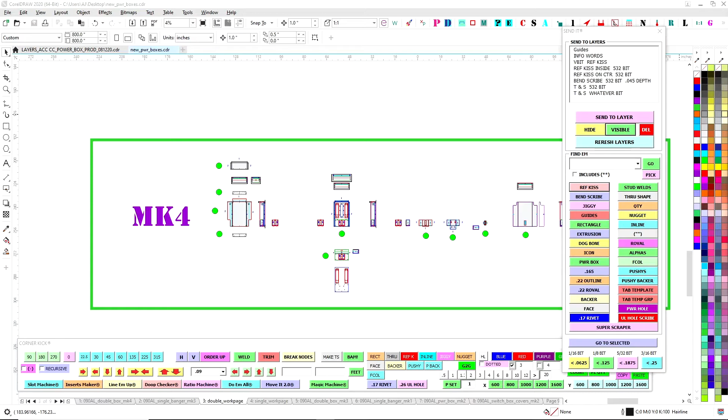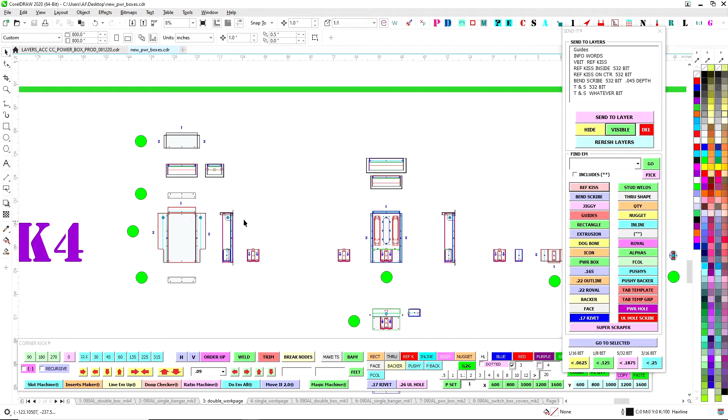All right, so a quick review of our standard power supply boxes here. This kind of piggybacks off of the last video. So we will be using the double banger for the north side Agua Caliente letters because the access is only a 12 inch by 12 inch access panel. So we had to make this a lot smaller.

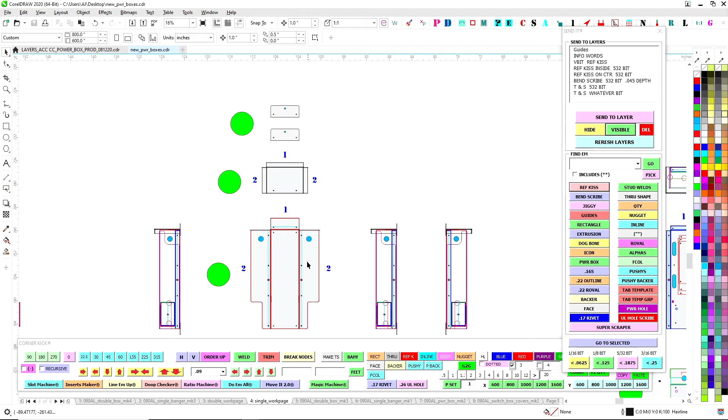And as you remember, I had already put the single banger on a serious diet. You know, I wrung that engineering dish rag out as much as I could to get everything as small as possible, as tight as possible. But that meant that the single banger was on a different track than the double because I hadn't quite got around to thinning up the double yet. So the Agua Caliente job has made it to where now it's all caught up.

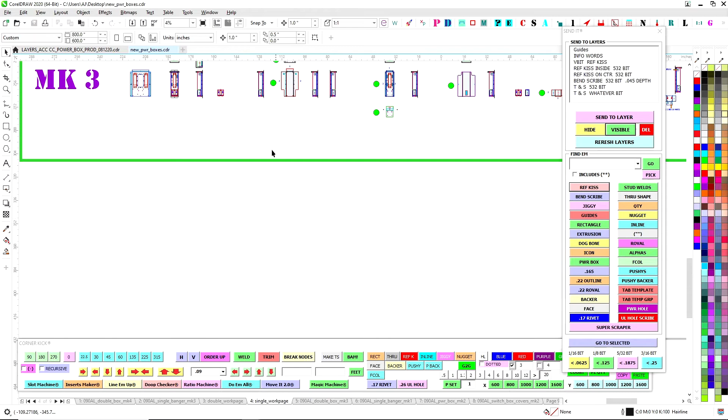So the Mark IV is where we're at with the double. And now that mimics all of the things we were doing with the single. So it has the side holes and it's got the same power box now. So the power box is smaller and it's the same. So that got rid of those little tabs. We no longer have those tabs. And the green part now interlocks. It hooks up there. And then this is raised up to grab that. So we're all good there.

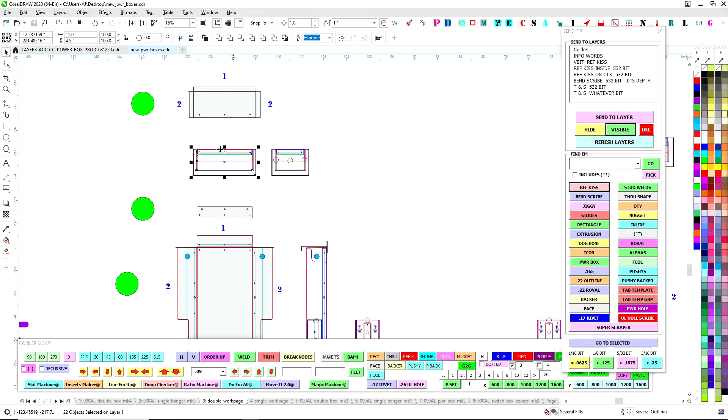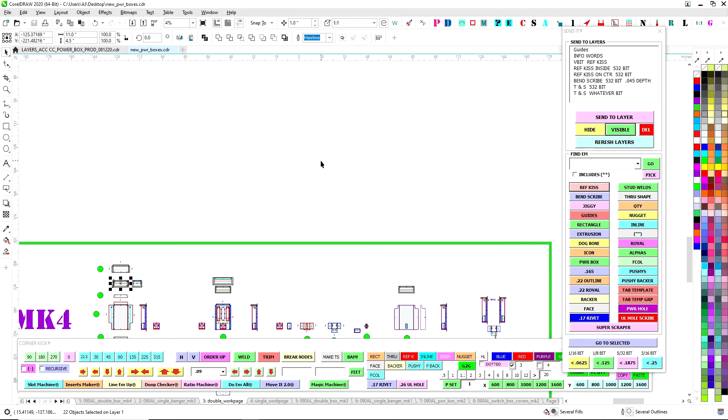Now we're matching and it's a lot narrower. So now we're to an 11 by 4.5, which is fine because usually the standard access panel is now 12 inches. So this will be a good thing going forward. It should be able to get into wherever we need to be. It has the included UL drain holes, but now the power boxes are the same. The Mark III double banger had a bigger box, and I remember it had that flange on there. So all of that now is scrap, and going forward, these are all going to be the same.

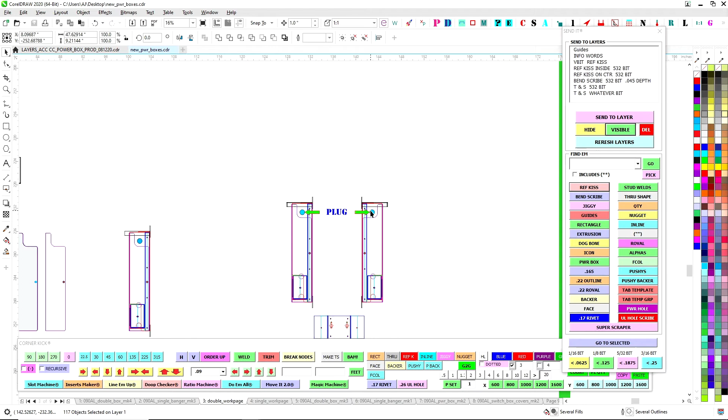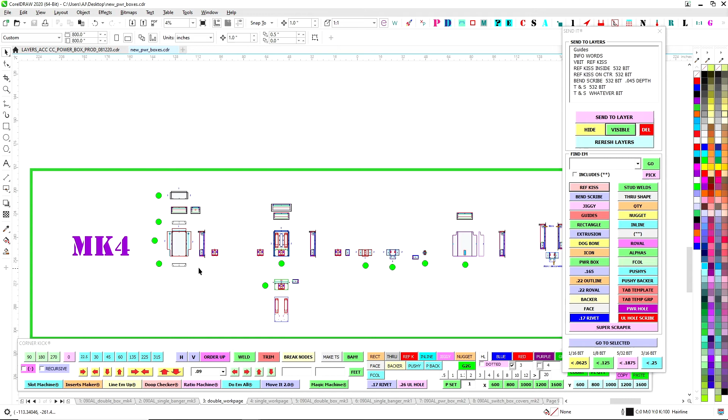So that's nice. And then we've got the notches here to be able to get in there, so we're good there. So you're going to ship them plugged, and you're going to ship it with one plug, just like the single. So now we're all on the same page as far as production. Going forward, I think this should work. So just ignore all other previous versions. We can ship them fine, but you're going to have to make sure you use the newest Mark IV to ship to ACC. You can't send any of the other stuff there because it's not going to fit.

So going forward, we can use up what we have. But in production, we're going to do only Mark IV on the double bangers, and we're going to do Mark IIIs for the single bangers. And I will go ahead and update the files and make sure the route department knows that too, so they don't accidentally route any of the other stuff. So anyway, that should be it.